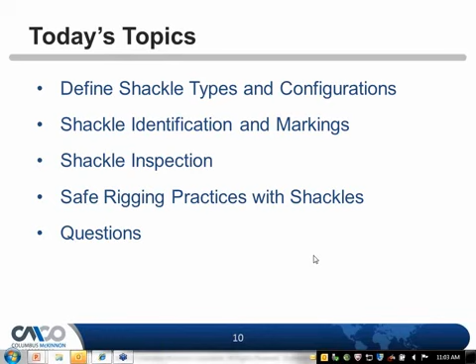All right, thank you everybody for attending, and we'll get started. Today's topics we'll try to get through in the next 45 minutes are: define shackle types and configurations, shackle identification and markings, shackle inspection, safe rigging practices with shackles, and then we'll take some general questions that you have at the end.

So just to start, all CM shackles are made from special bar quality material and comply with ASTM A322, ASTM A576, or ASTM A921. And we also meet U.S. government specifications RR-C-271, ASME B30.26, the EN standards, ISO, DNV type. Galvanized shackles meet ASTM A153 and B675, and pins and bolts meet SAE J429 and ASTM A354.

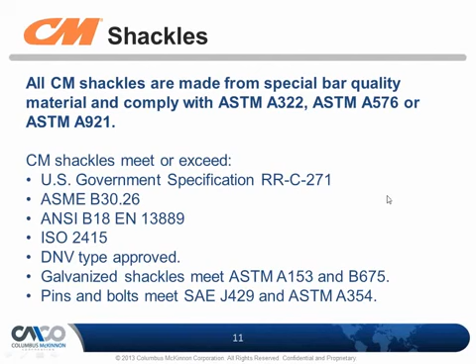So a lot of quality goes into our shackles, and we do extensive testing on them to be sure that they're safe to use out in our marketplace. So let's start. We have different types of shackles, and just to quickly go over those, we have the screw pin anchor shackle, as you can see. Just has a screw pin. There's no bolt and nut at the end.

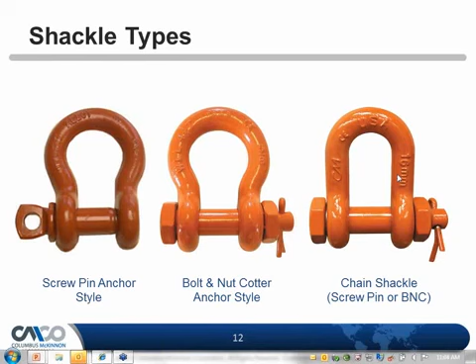The actual thread goes into the body of the shackle, and that's usually the rigger favorite because it can easily be unassembled and reattached in the field. We have the bolt nut cotter style, which does have the bolt, nut and cotter, as you can see there. And then we have the chain shackle or the D shackle, which is a smaller, more compact type shackle, and we'll get into those as well and how those are used.

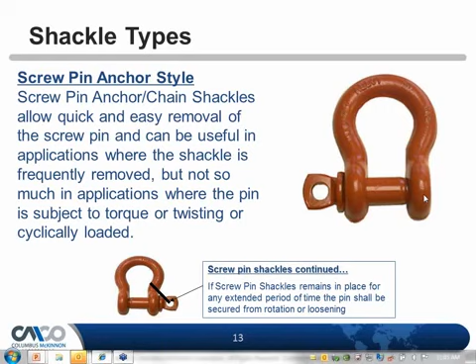So let's start off. When do we use a screw pin anchor shackle? Again, it's for easy removal. It's usually the rigger's favorite. You don't have to have any tools with you out in the field. It does have a hole in the pin head there, and that is for a spanner wrench. So in the event it does get a little locked up, you can put your spanner in there and undo the pin.

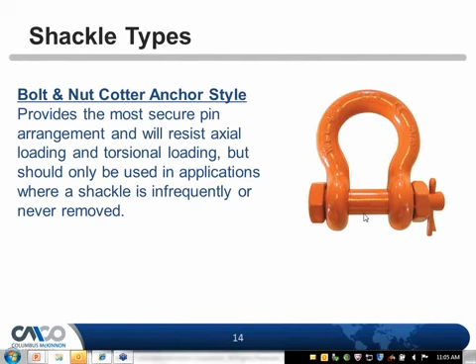These are more for temporary connections, but where it's a semi-permanent or permanent connection, we want to move to the bolt nut cotter type. This way we know it's secured on the load. You must have that cotter pin in place as well to prevent the bolt from backing off. So if you're going to leave this on a piece of equipment, where you don't want to keep taking the shackle on and off, this is what we recommend that you use. Both are the same shackle body, it's just the pin design is a little bit different.

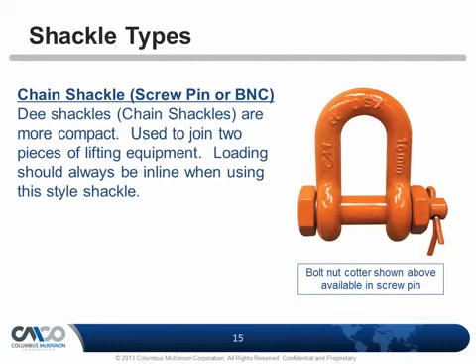When you want a smaller, more compact shackle, then we use what we know as the D shackle, or we call them chain shackles, and they're more for direct inline loading or where you need a smaller body shape, and that's where we recommend these types of shackles. But its applications are similar. Okay.

Okay, and then this shackle here is called a round pin shackle. This has no threaded connections at all, and this is more for load securement or towing applications, tensioning, things of that nature. There's no threaded connection. There's no threads within the body of the shackle or on the pin. It just has a cotter key going through it.

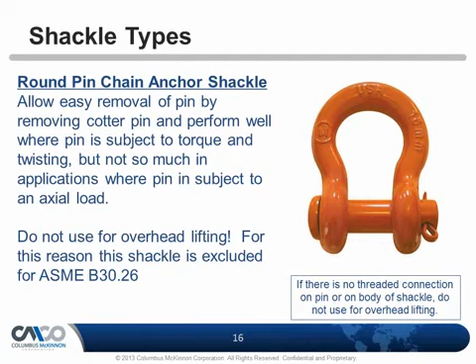It's really not recognized by ASME B30.26, and so we do not recommend this shackle for overhead lifting. We feel that the threaded connection shackles are the best bet for overhead lifting. In the event you were to lift something and something were to strike that pin, all you have is a cotter key holding that in place. And so we steer people towards the threaded connection type of shackle.

Okay. With that said, shackles are made from three material types: carbon, supercarbon, which is specific to CM only shackles, and then we have alloy shackles. All have different working load limits, and all can be used for overhead lifting. Some of the confusion that we get is because we are a chain manufacturer, and in the chain industry we can only use alloy chain for overhead lifting.

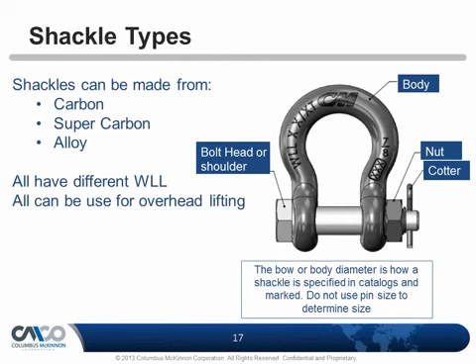Well, shackles are not chain. You are allowed to use carbon, supercarbon, or alloy. It's whatever your preference or the application that you're going to apply that shackle to is how you choose that. And we'll go over a little bit about pros and cons of using each of those, okay?

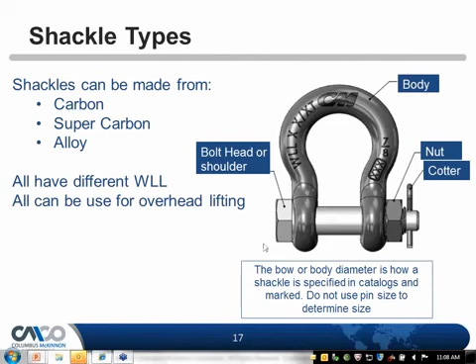However, with that in mind, that we have three different materials, we never want to go by the diameter of the shackle, as in, okay, we have all 1-inch shackles or 7/8 shackles, they must all be the same working load limit. We need to look at the embossings on the shackle to identify the working load limit, because you are going to have different working load limits with the same diameter size, given the different materials they're made from.

So here's a side-by-side chart showing the different types of materials that shackles can be made out of. Let's just take 1/2 inch. Let me highlight that for you. In the carbon, 1/2 inch is good for 2 ton, supercarbon is good for 3 ton, and the alloy shackle is good for 3.3 ton. And we look at the design factors. The carbon shackle that we manufacture is a 5-to-1. The supercarbon actually has a 6-to-1 design factor, and our alloy is a 5-to-1 design factor.

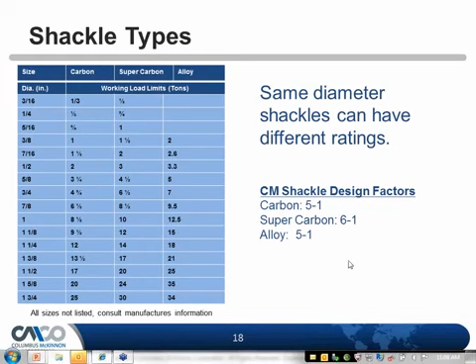Okay, so the big difference between them, and you want to start looking at markings. And markings are huge today. Understanding what those markings mean and why we put them on there ensures quality inspections, safety, and that the riggers are using safe equipment and can identify their equipment properly.

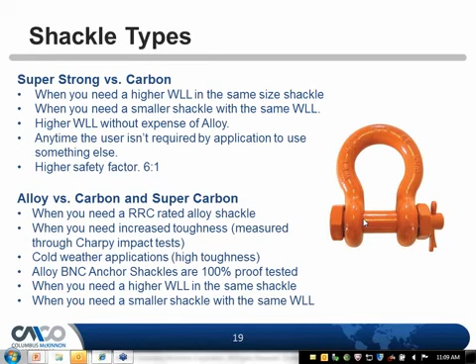So when do I want a supercarbon versus a carbon? If it's nothing special, just general type of lifting, I'm sure carbon will be fine. If you need a higher working load limit with the same size shackle, then you want to move up to the supercarbon. Hey, I can't use that larger shackle because it may not fit properly, but I need a higher working load limit. Then you step up to the supercarbon.

Again, you can go to a smaller one, or vice versa. We need something smaller. You can go to the supercarbon instead of going to the next higher carbon size. A higher working load limit without the expensive alloy, because alloy shackles are a little bit more expensive. So if you want to save a few dollars, stick with the supercarbon. Anytime the user isn't required to use something else, we recommend supercarbon. And again, a higher safety factor.

Alloy shackles: when you need an RRC rated, that's a government rated shackle, which meets certain quality standards. There'll be military specs out there that require government rated shackles, so we'll have those for you. When you need increased toughness, and toughness is a combination of strength and ductility, alloy probably has the best toughness around. So in cold weather applications it will hold up a lot better, and it also resists shock loading. I'll have a few slides showing that coming up.

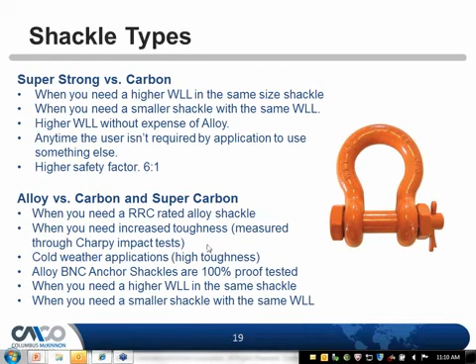Alloy bolt nut cotter shackles are 100% proof tested. Again, if you need higher working load limits but the same shackle size, or you need a smaller shackle with the same working load limits, then you go to the alloy. So it all depends on your application, how things fit, and what environment you're putting it in, why you would choose one over the other. So here we have a comparison of our supercarbon versus just a regular carbon shackle.

And again, CM is the only one that has supercarbon shackles. And again, this is what is called toughness, and toughness relates to strength of the shackle. Really, it's a combination of strength and ductility. And so what it results in is it's very resistant to shock loading, so it holds up a lot better.

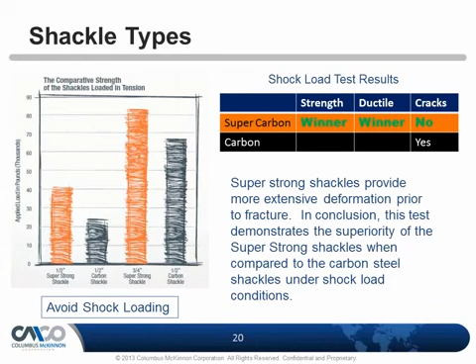But, of course, we do want to avoid shock loading. I do want to mention that, but we realize that things happen out in the field, so the more safety you can have where it does happen, it will try to prevent any type of failure.

Shackle identification and marking. So what do all these markings on this shackle mean? And that's important as a rigger. The very first thing you need to do as a rigger is inspect that shackle. What's the markings on there? Who is it made from? Is it the right size that you need?

And CM right now is coming out with enhanced identification markings. The forged identification markings on the shackles will be the largest and the most user-friendly on the market. The larger, the more legible it will become. Improves operator safety by reducing the risk of users misreading or being unable to read important size and working load information.

Reduces replacement costs by decreasing the necessity of out-of-service issues due to worn or illegible markings, because if it's not marked and you can't read it, you have to take it out of service. So you'll have a longer life of using the shackle. So it makes it easy to identify as a CM shackle, that it's a good quality shackle.

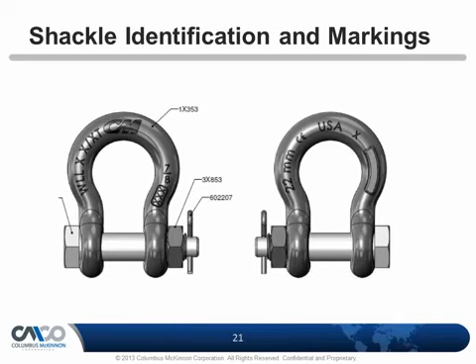And so what is required by ASME, the industry standard B30.26: name or trademark of the manufacturer, and you can see in number 1 there, the CM logo. You should know who it's made from, a reputable manufacturer. I've seen shackles out there that say China, and that's it. I'm sure China is not the manufacturer of that shackle, so who do you go to when you need technical information or something happens? Who's that person you talk to when you're in that bind?

Okay, we spend thousands and thousands of dollars on our rigging, mobile cranes, hoisting equipment, and the shackle is just as important. It may not be as expensive, but it is part of the lifting system, so why would you skimp when it comes down to the lift point or the shackle?

Number 2, the rated load. Of course, that needs to be on there, how much it can lift, and the size and the diameter of the body, which also will be stamped. And then we also have a trace code, which internal to CM is a 3-digit trace code, so it means something to us. So if there was a problem, we can get those trace codes and track it back.

Also, what's new now is a raised surface, since a lot of customers are requesting to put serial numbers on shackles, so now they will have the ability to serialize their shackles for inspection purposes and quality, and to be sure that rigger has a good shackle in service.

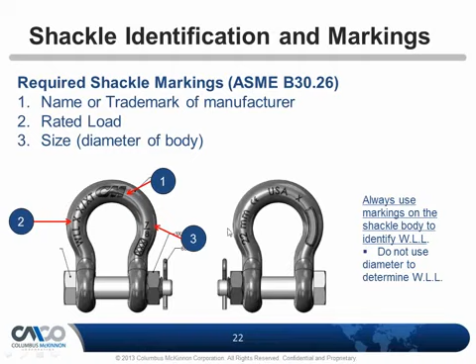Now that's important because we have 3 different types of shackles, right? So what if the pins got mixed up? Well, how do I know what was for the alloy, or how do I know what was for the supercarbon or the carbon? Well, in this case, it doesn't matter. All our pins are high strength.

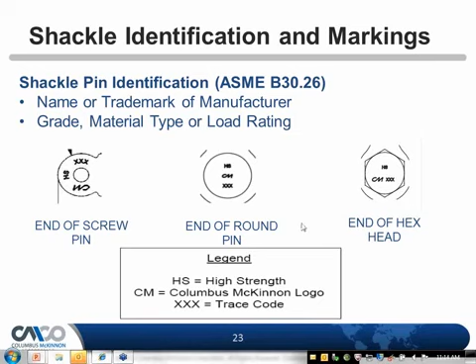So we designed the same pins for all our shackles, size for size, so that if at the end of the day you had three 1-inch shackles, all of different material, let's say a carbon, a supercarbon, and an alloy, and those pins got mixed up, it wouldn't matter, because CM has all the same pins, so you don't have to worry about the strength level of the pins. All the strength levels of the pins are the same.

But even the pins are marked. That means something, right? So now you know that that pin is a quality pin and it's not an aftermarket one or someone just threw something in there.

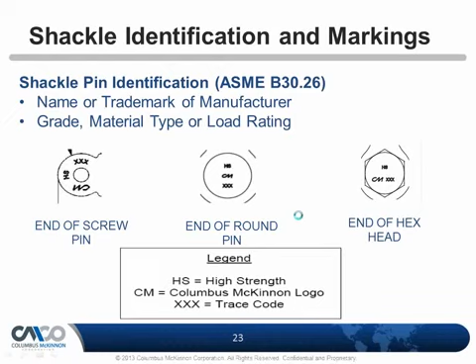So all those markings mean something. And so here you can see CM, which is, of course, Columbus McKinnon, has a trace code, and HS for high strength. Okay. Again, that's important. I know the forging plant right now is changing the styles of their pins so they're more efficient. They thread in, fit easier, great connections. So they're working hard to make it more user-friendly and have great engagement at all times throughout the manufacturing process, and to get out into the field so that it's a good quality shackle.

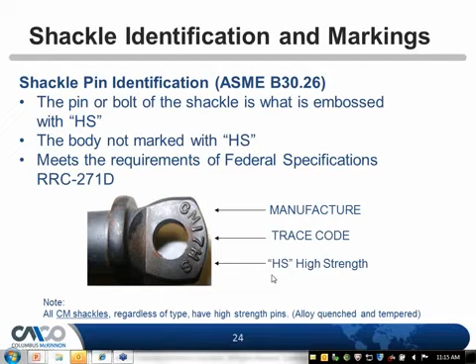And I'm very impressed with the shackles that CM is coming out with today. I think they're one of the best in the industry, and just all in all, a very impressive shackle compared to 5-6 years ago. I think it doesn't even compare. They're I think right now the best looking shackles and quality shackles on the market.

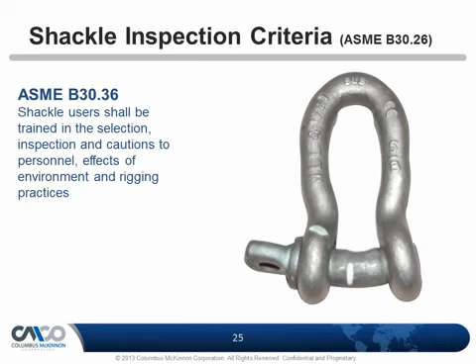All right, inspection criteria. So now we got through what all those markings mean. We chose the right shackle, but now we want to be sure it's safe to use. So that's our next step as a rigger, and so we want to go through and inspect it before we use it. So a visual inspection shall be performed, and where it's in a location where you can't get to, or it's not feasible to inspect every lift, you have to at least do a periodic inspection on those shackles.

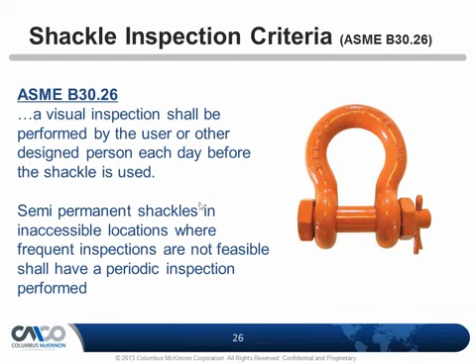So at least once a year you should be looking at that, or more, depending on the severity of service. So it might be 3-4 times a year. But in reality, if you're applying the shackle for a rig, it's not a big deal to inspect it. You should be inspecting it and being sure it's safe to lift.

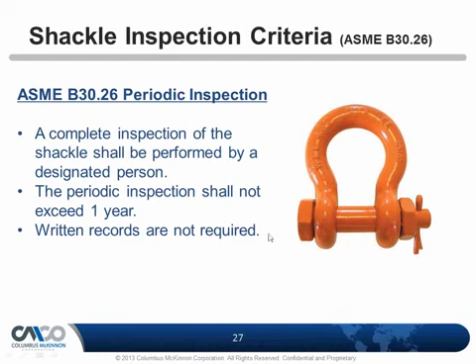So what is a periodic inspection? It's a complete inspection of the shackle, performed by a designated person, not to exceed 1 year, but written records are not required. I teach people in our training, just look over all your rigging equipment when you use it as best you can, do a frequent inspection, look it over, be sure it's safe to use, understand what you're looking at. You're just going to make a safer lift.

And so what are the rejection criteria? So we're looking for wear, any part more than 10% of the original dimension, any type of distortion, twisting, stretch, elongation, cracked, or broken components. If you're in doubt, take it out of service. Look for excessive pitting, corrosion, indications of heat damage. The markings all have to be there. If you can't read the markings or you're not sure, is that a 1 ton or a 1.5 ton, it's got to come out of service. You just take the guesswork right out of it and remove it.

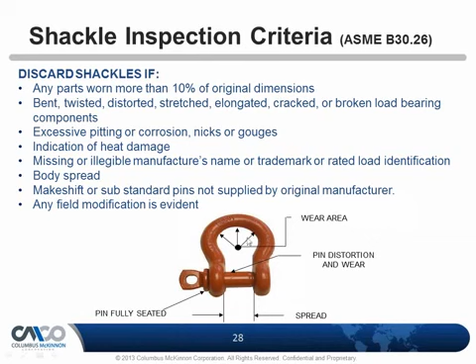Look for body spread. You'll know that, especially in a screw pin, because it'll be very tough to thread in. So the bolt nut cotter may not line up. Probably it will be tough to get the pin out. Look for makeshift pins. Now that you all know what the pins look like, you can look for substandard pins. And then also any field modifications, any type of welding, or someone did something they weren't supposed to the shackle that causes you concern, take it out of service.

Again, if it was designed to have a cotter pin, it must be there in place and in good working condition. So if you have a bolt nut cotter type and you're missing the cotter, you need to get a cotter in there before you use it for rigging.

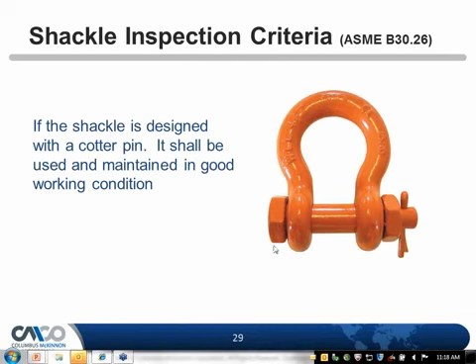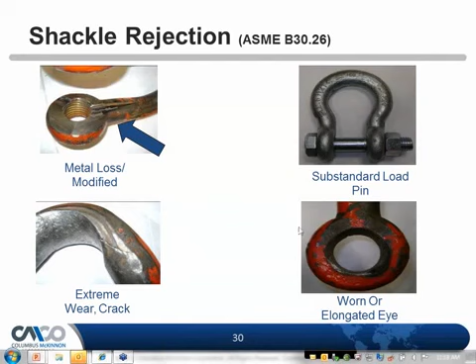And just some pictures of things that we find during our inspections. Common in shackles, people like to grind the eyes because they don't fit properly, and instead of getting the next size up, they'll grind the eyes to make it fit. So that's not good. Believe me, we have just enough material in there to hold a load, and by removing material, you're creating stress risers, and who knows what it's good for at this point. Again, substandard pins, cracks, elongated eyes, those will start to get worn over time, so we need to be aware of that as a rigger.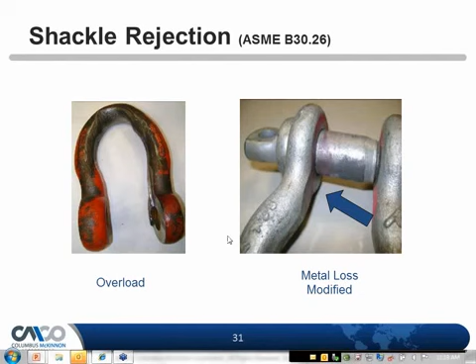Again, just certain things we found, grinding and wear, and the shackle off to the left, overload, just extreme deformation there. Get it out of service. Anytime you suspect you overloaded it, or someone has overloaded it, take it out of service. So all right, now we've selected our shackle, we've inspected it, and our next step would be to rig with it. So how do we rig properly with it?

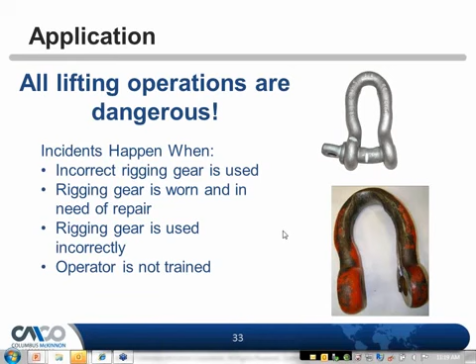All right. So usually, why do rigging accidents happen? We either select the wrong gear, gear's worn, it's used incorrectly, or the operator's not trained. So things like that in those pictures should never happen. And if I'm doing an inspection for somebody and I find rigging equipment like this, I know that their riggers or their operators need to be trained properly because they're doing something wrong, or they selected something wrong and the application is the wrong fit for whatever they're using.

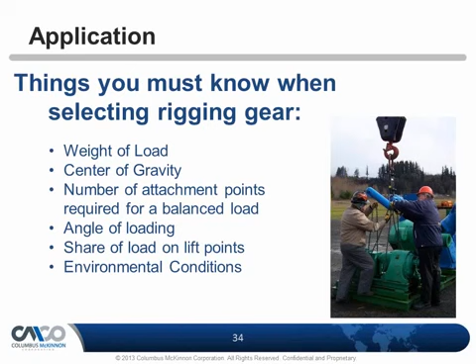So as with any rigging operation, no matter what you're choosing, whether it's shackles or swivel hoist rings, chains, synthetics, wire ropes, you need to know how much weight you're lifting, where your center of gravity is, the number of attachment points, angle of loading, the share of load on those points, and the conditions that you're working in.

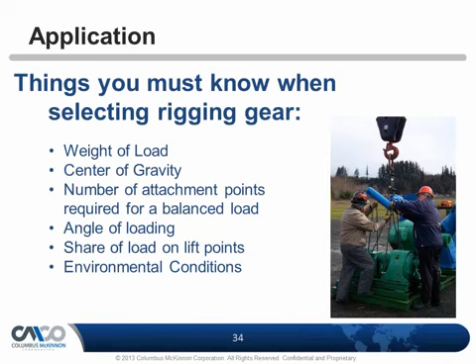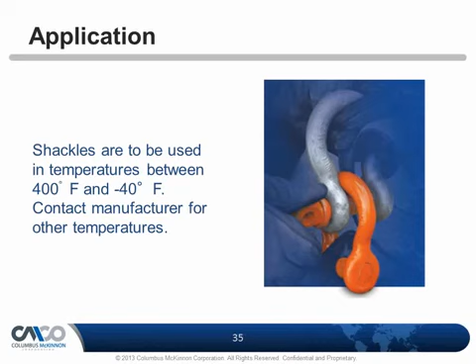Shackles can be used from 400 degrees Fahrenheit down to -40 degrees Fahrenheit, and if you go any temperatures beyond those, contact the manufacturer of the shackle to see what the rating would be used in those environments.

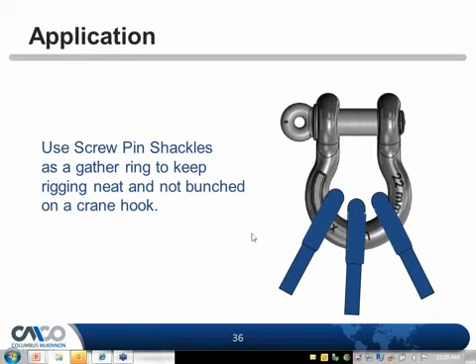Screw pin shackles are great to be used as a gathering ring, so we're going to connect multiple slings to it. In the entertainment industry, that's common, where they have drops and they connect various slings to it to get their points. And we do it in construction for synthetic slings, to connect synthetic slings to make a bridle assembly. So that's another use of a shackle, not only as a lift point on a load, but also as a gathering point for slings. But we want to avoid bunching on the slings.

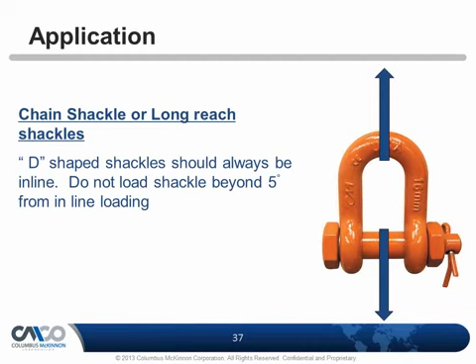D-shaped shackles, as we mentioned before, are more for inline loading, and we really don't want to see side loading on D-shaped shackles. So they are great. They're nice and compact and easy to use for tight spaces, but you really want to use those for straight pulls. You don't want to have a shackle orientate itself in the wrong orientation. Try to keep everything in line. Otherwise that will weaken and damage the shackle.

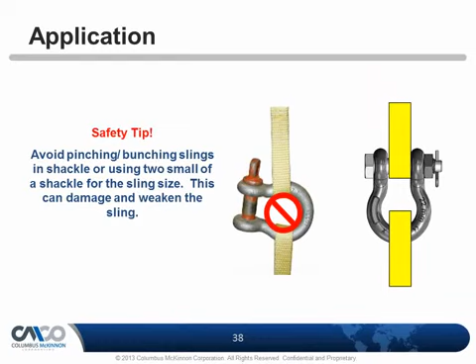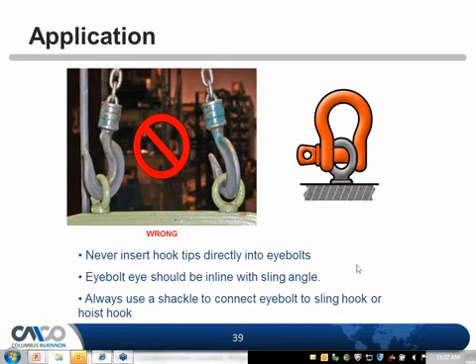Be sure that you're using the correct eye bolts. They're seated properly and in line with your sling tension. And then that's a proper application. And always take your reductions when you're looking at angles. Again, that's something we teach in our rigging seminars, how to take reductions versus angles on eye bolts and other rigging equipment.

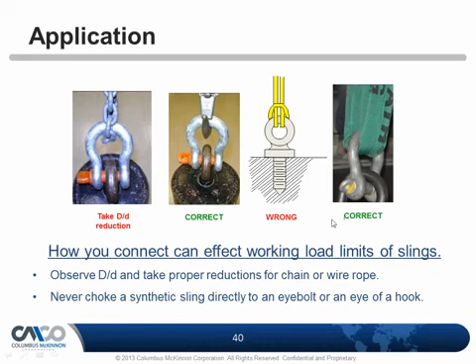Choking a synthetic in any eye, whether it be an eye bolt or an eye of a hook, is a very bad practice. It's like tying a knot in a sling, and so you're going to have a failure when you do that. So that's not correct. You want to throw a shackle in there, and you can see the next picture. That's the way to do it. And you have to have full width. You get full width of the sling the way it was designed, to get full working load limit.

It is a lift point. Again, we spent thousands and thousands of dollars on the lifting equipment from top to bottom, and yet we're going to connect to some piece of plate that somebody blew a hole through with their welding machine on some minimal plate, and we can lose the load that way.

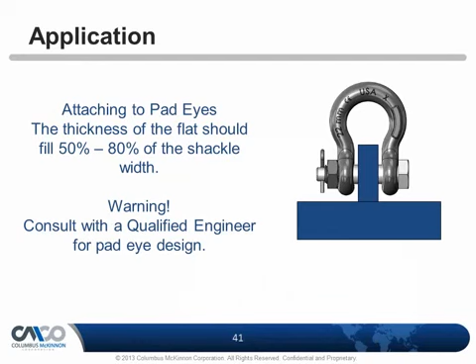So why would you spend all that money on the quality equipment that you have to lift safely, and then you're really not going to worry about the lift point that you're lifting from? And that's common, and it's just kind of a backwards type of thinking. It's always your weakest point in the lift that's going to fail, and lift points are one, so you always want an engineer to design a lift point. Right now, there really isn't any standard on lift points other than get somebody that's qualified that can calculate the shear strength of that steel.

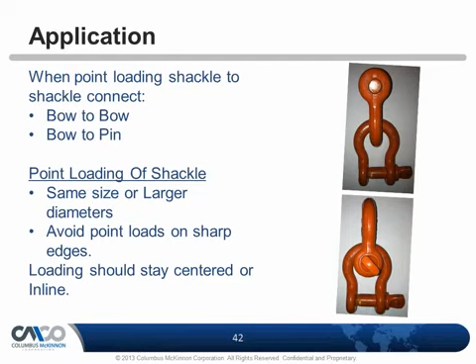When lifting with shackles, if you're going to connect two shackles together, we recommend bow to bow or bow to pin. Point loading of shackles: try to use the same size or larger diameters when connecting to the shackle. Avoid point loading of sharp edges. Obviously, that's going to damage the shackle. And try to stay in line as best as you can.

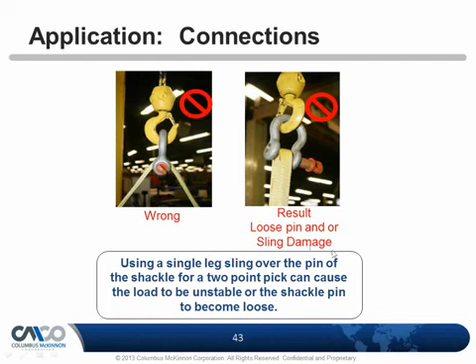Don't loop slings through the eye of the shackle or on the pin, because that can loosen up the pin. And also, it's a very unstable load by doing that. If you have an offset center of gravity, you're not going to have much load control. So really, we don't recommend that type of rigging practice. So the correct way, there's the proper connection. We always say bow to sling when you can, and then you would connect your hook into the pin side.

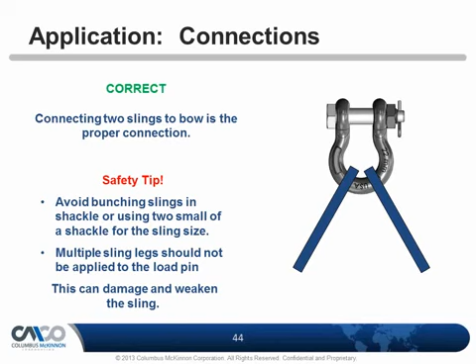But avoid bunching. Avoid too many legs, multiple legs. Again, don't try to shove everything into one shackle. Use multiple shackles if you can. You may even have an oblong link, or what we call a master link, that you can connect the shackle pins to, and basically you're making a bridle assembly by doing that. So various ways to do that.

Just as food for thought, when you're connecting bridle assemblies to a hook, you only have a maximum included angle of 90 degrees. If you go beyond that, you can tip load the hook or pull the hook out. A master link gives you 120, and a shackle also gives you 120. So another reason you may want to throw a shackle over a hook. A master link is kind of limiting because it's tough to connect other slings to. So, a combination of an oblong link or master link and shackles.

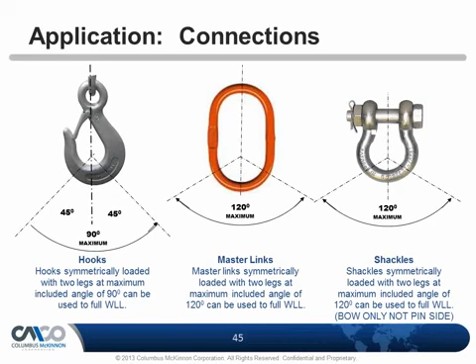Basically, if your rigging doesn't look clean, it's probably wrong. It's probably bunched up. So you want to get a nice, clean look to your rigging and your connections. And if it doesn't look real clean, you probably have incorrectly sized everything. So you want everything to lay properly and in the right orientation. And when that happens, and if you selected everything right, you shouldn't have a problem.

When doing chokes, the bow of the shackle should be put into the bite of the choke and not the running part of the choke. So in that picture, that's the correct way. That's a double wrap choke on a loose bundle, and that's highly recommended to have control. Anytime you are lifting loose bundles, by the way, you're going to want to have 2 points of connection. So in this case, I would want 2 slings and 2 double wrap chokes coming in on that.

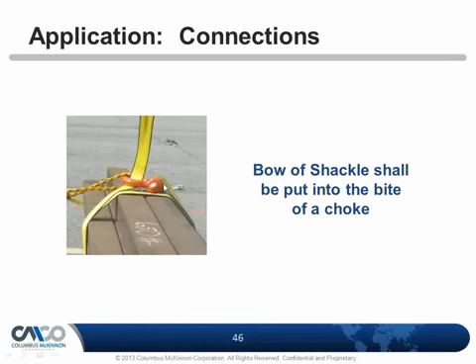I would never want to do a single pick on a loose bundle, or what's called a below the center of gravity lift. However, there you can see the bow is in the bite of the choke. That reduces friction a lot, and also you're not putting the pin in there, which can loosen the pin.

Side loading of shackles, and CM has produced this for years. This is now in the ASME B30.26 spec, and your reduction for side loading. If the angle is 0 to 5 degrees and in line, you're going to get 100%. From 6 degrees to 45 degrees, you're going to get 30% reduction of load, and then 46 to 90 degrees, 50%. And again, this is symmetrical loading. Obviously, if you have unsymmetrical loading, you're going to have to figure out your share of load.

And once again, we caution against using round pin shackles. Those are the shackles that do not have any type of threaded connection. They're just a cotter pin retainer. We highly recommend that you don't use those for overhead lifting. Keep those for tensioning or securement and towing.

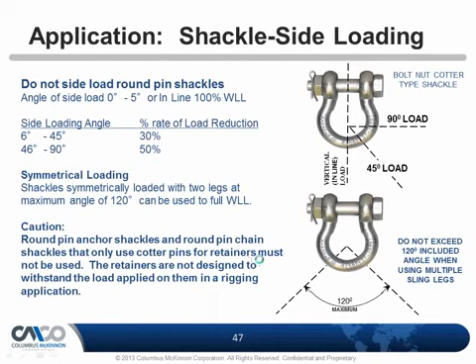So again, off-center lifts, you can see here shackles can twist. I had another slide showing that where it was a full side load, but we really want to avoid that. So we try to get it in line as best you can, and if you can't, take your proper reductions, be on the safe side, and reduce the working load some based on the charts that we just showed you, or call your manufacturer of the shackle and get that information

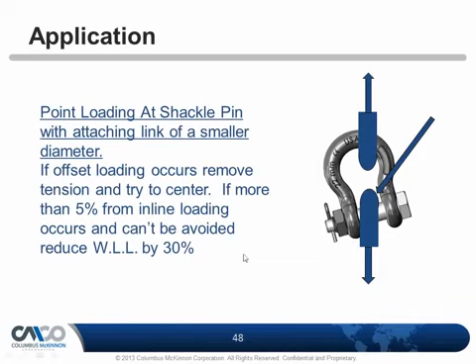from them. You can recenter it, or some people have used washers or bushings or things of that nature to try to keep it centered. If that's not practical, then take your reductions.

D to D ratios. So if you're going to use a wire rope, let's say you loop it through a shackle, and that D there is, let's just say, the body of the shackle. Well, if you have too small of a diameter, really you should be matching the shackle diameter with the same size of the rope diameter. And again, if you can't, then you're still going to start losing work limit.

But in this case, this shows a basket sling, and in the basket sling here, really to use a basket sling, we would have to have at least 25 to 1, in this case 30 to 1 times the diameter. So big D has to be 25 to 30 times bigger than the diameter of the wire rope. If we don't achieve that, we're going to distort that wire rope, and it's going to damage it, which means it was misapplied. And so we have to pay attention to D to D ratios.

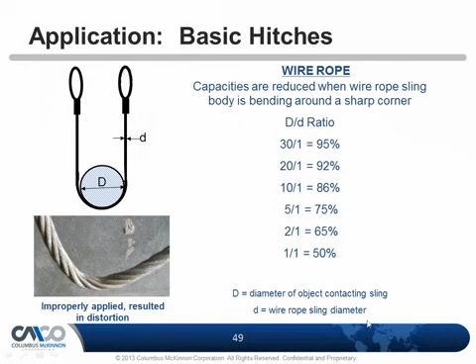If the shackle is going in the eye of the sling, then we want to match the diameter of the wire rope to at least the diameter of the shackle right in here. Basically, the eye is a basket, and so we want to match the diameter of the shackle to the wire rope size.

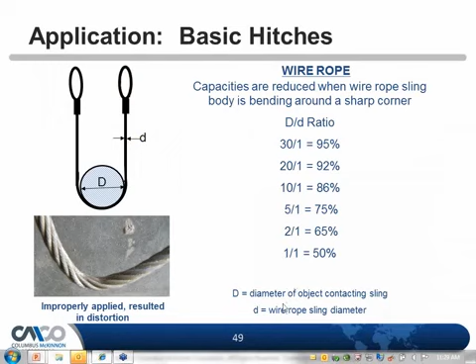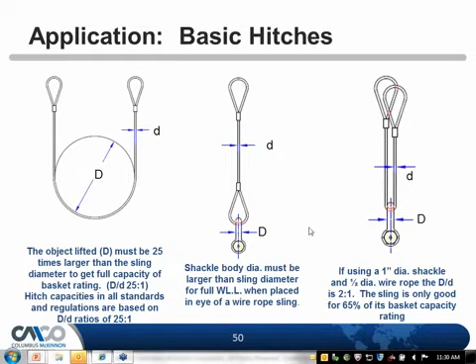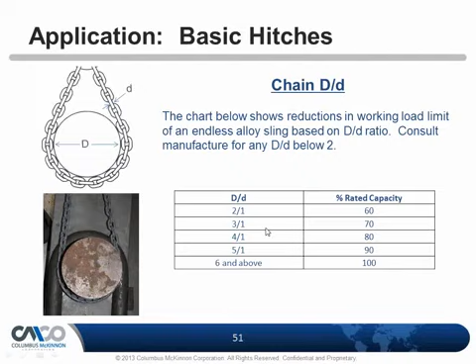Okay. Everyone, thank you very much. Just a quick thing, and thanks for the feedback, Gregory. A couple points came up about the zip ties, Peter, and I just thought we better mention these before we wrap up. Yep. I'll go ahead and close that. The point was I wouldn't use a zip tie in an outdoor application, and Brian also said that zip ties are rated but cannot be exposed to sunlight for too long. I don't know if you want to just add another quick note.

No, that's great information, and I'll read right from the spec what it reads. It says, for long-term installations, bolt-type shackles should be used. If screw-pin type shackles are used, the pin shall be secured from rotating or loosening, and that's all the standard says. So what you use, again, there's nothing to say what you can and can't use.

So I probably had Brian Sickles from the entertainment industry, who is an ETCP certified rigger who has extensive knowledge in outdoor rigging, and so you're also hearing from an expert there that, hey, there are some drawbacks for using zip ties. Yeah, they're convenient, and that's why I said I do recommend steel. A steel wire is your best bet, but something's better than nothing. There's really no standard. It's best practice, is what I always preach. But Brian, sure, thank you for that information, and yeah, that's great information.

Okay, and like I said, so there you go, like zip ties, right? Rated zip ties. Yeah. There's more to rigging than you think. Yeah. Really, are zip ties rated? Yeah, it is. There's things to look for.